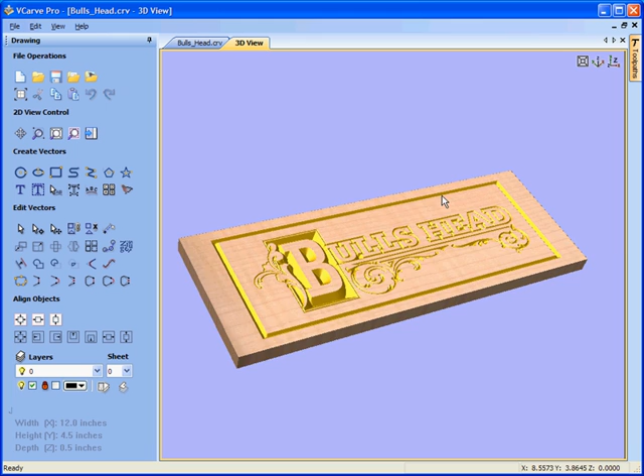In this tutorial, we're going to show you how quickly and easily the software will convert a two-dimensional graphic, such as this pub sign or restaurant sign, into a 3D toolpath that can be VCarved or engraved on a CNC machine. The software converts two-dimensional vector geometry into three-dimensional CNC toolpaths. We see here in the three-dimensional view the VCarved or 3D engraved result.

We close this file, so file close. We're going to open a DXF file, so file open. Here we have the Bull's Head DXF file. This is in the samples folder installed with the trial version. Open the DXF file, and specify the size of the material we're going to work with.

We'll have a piece of material 12 inches by 4.5 inches by half an inch thick. We want the origin to be in the bottom left hand corner with no offset, and we want the geometry to be in the center of the material. The white area represents our 12 by 4.5 inch piece of material. The Z0 origin is on the surface of the material, so you would set your cutter just touching the surface of the material and set this to be Z0. We click OK.

You'll see now that the geometry, or the DXF file, is displayed in the two-dimensional view. Down the left hand side of the interface we have the drawing tools, or what we refer to as the drawing tab. Here we can open files, import files, and import image files for tracing. We also have options for zooming and working around in the two-dimensional view.

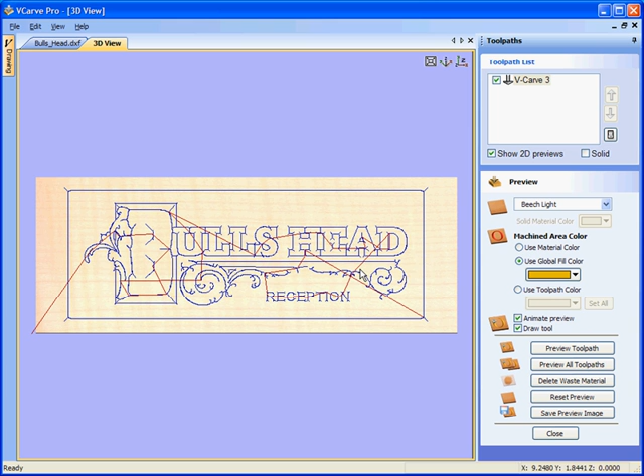I'm going to engrave or VCarve without a flat depth. We say calculate. The software now calculates the 3-dimensional toolpath, opens our 3-dimensional view. I can twiddle this using the left hand mouse button, so click and rotate. If I hold the right hand mouse button down, I can push and pull to zoom in or out.

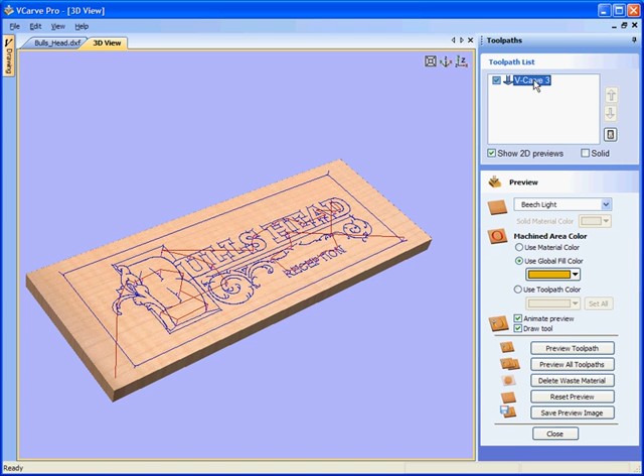The preview form has automatically opened. The toolpath is selected. I can say preview this toolpath. This shows us what this cutter will do when we run the toolpath on our CNC machine.

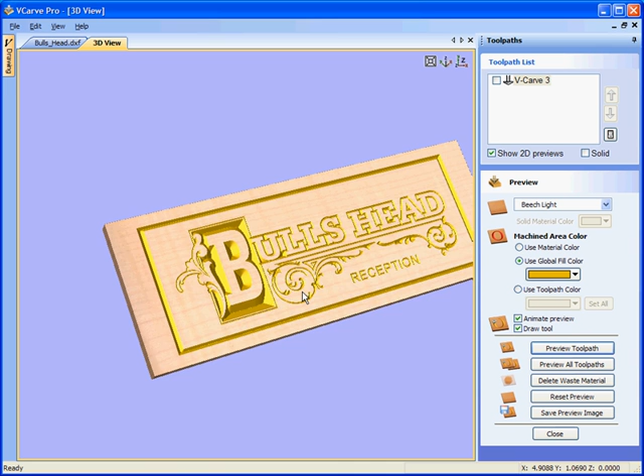With the 3D preview in the 3-dimensional view, I can pan it by holding left and right mouse buttons together, and then push with the right mouse button to zoom in. We can change the color fill.

Let's say we wish to preview this as a blue fill color. We can twiddle with the left mouse button. We can change the material type, so we can change it to be a different material.

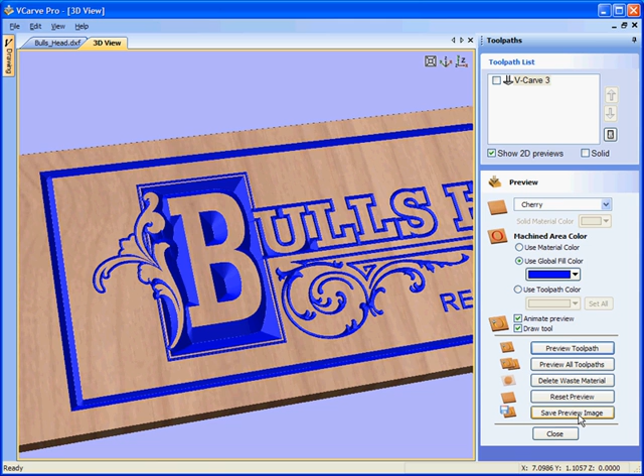We can save this, so we could save the 3-dimensional image for emailing to a customer or adding to a website or including in a brochure. Once we're happy with the 3-dimensional preview, click close.

We can now estimate the cutting time. This tells us approximately how long it will take to machine this part. Click the close button. We can now save the toolpath.

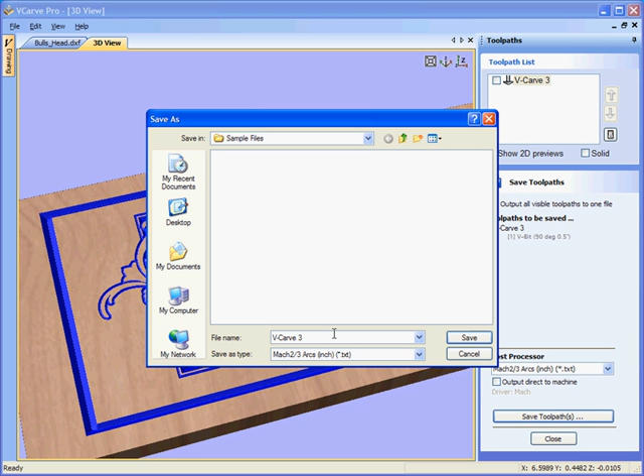Click save, and select the post processor for the machine that we're working with. Click the save button. Give the toolpath a name, and this is now ready for opening in your CNC control software.

If we close the save toolpath form, we can just summarize what we've been looking at. If we swap back by clicking on this icon here, we swap to the drawing tab, so we swap to the drawing tools on the left. Click to open the 2-dimensional view.

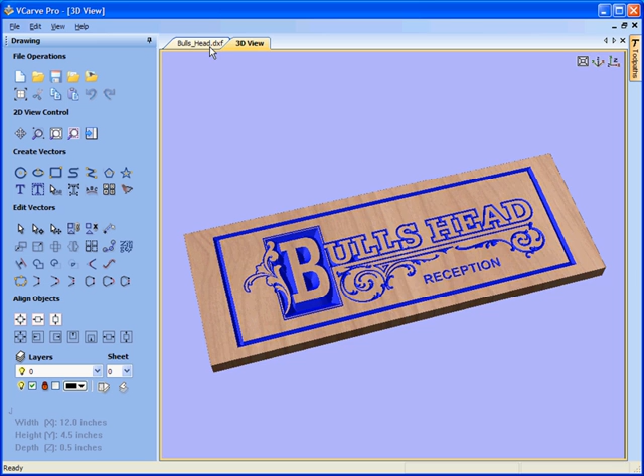You'll see here we can zoom in. So we had our original 2-dimensional design that was opened. We could have also drawn this in VCarve Pro. We've added some text. Once we were happy with the size and the position of the design, we swapped from...

...the 2-dimensional drawing tab to the toolpath tab on the right hand side of the interface. We added a VCarving or 3D Engrave toolpath by clicking on the icon. We can edit the existing toolpath by double clicking on this file name or clicking the edit toolpath icon.

This opens the form, so we could edit the settings here. We could say, okay, we wish the machine to run slower, 50 inches a minute. Click OK and calculate. The software has now given us a new toolpath.

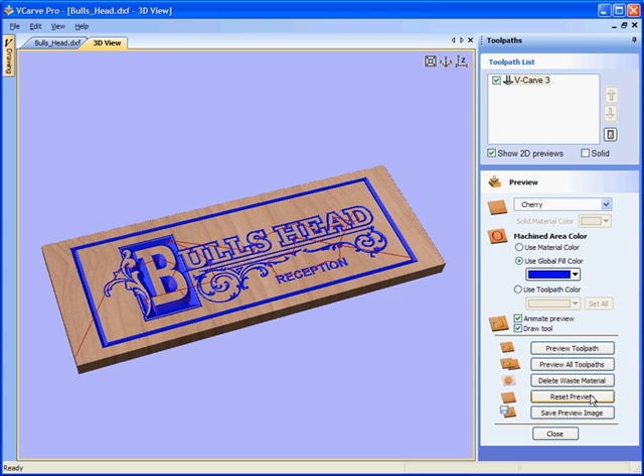We looked at the preview options, so I can reset the preview. We can zoom in and you'll see the blue toolpath lines. We can select the fill color, so we wish to use a dark red, preview the toolpath, and this shows us how the cutter will run on the CNC machine.

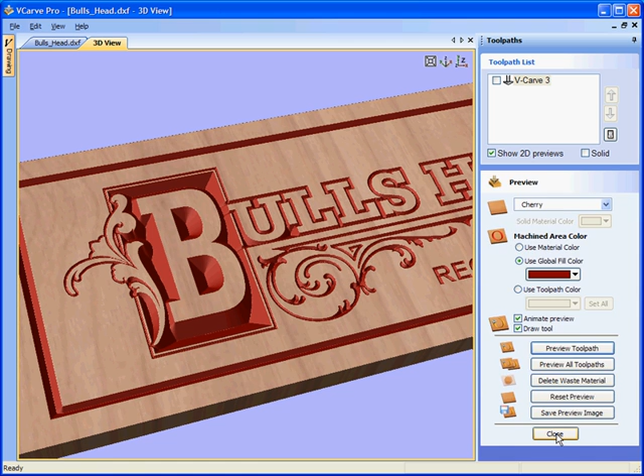Once we were happy with the toolpath, we close the form and we can save the toolpath as a CNC file by selecting the appropriate post-processor for our machine and then running the toolpath on the CNC machine.